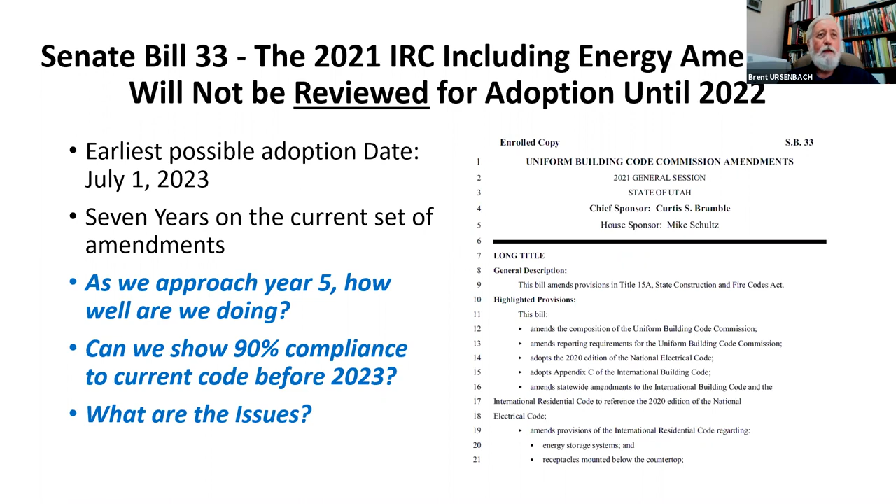There's no question building departments are busy right now and struggling for enough people. But I dare say those same building departments and their inspectors, when they go into a home, they regularly call out things about electrical outlets and other items throughout the house—spacing, enough space for the toilet, and everything else. Sometimes we just need to remember we can add to that list half a dozen or a dozen things to check when we do an energy inspection, and be thinking about energy when we enter that home.

Now, many of you are familiar with this—if not, I want you to know we have a handout, a little one-page handout, a residential guide. Many of you have seen this. We just updated this guide. The previous guide had... let me start over. I don't know if you can see my cursor—can anybody see it? Okay, great, I'll use it then.

I have a note here that this includes amendments effective July 1, 2021. I've eliminated all the text talking about the steps we made to get to this point. Starting at the first item, the red text indicates an amendment. Number 5 just says the 2012 Utah REScheck has to pass by 5%. I eliminated all the verbiage about the previous steps where we went from 3 to 4 and now to 5—that's what's occurring throughout the whole document.

Now, if your screen's not as big as mine, you probably won't be able to read this. So I'm going to break this down and go through each paragraph or section of this one by one in our presentation today, with a special focus on the amendments, but also just on the basics of the energy code.

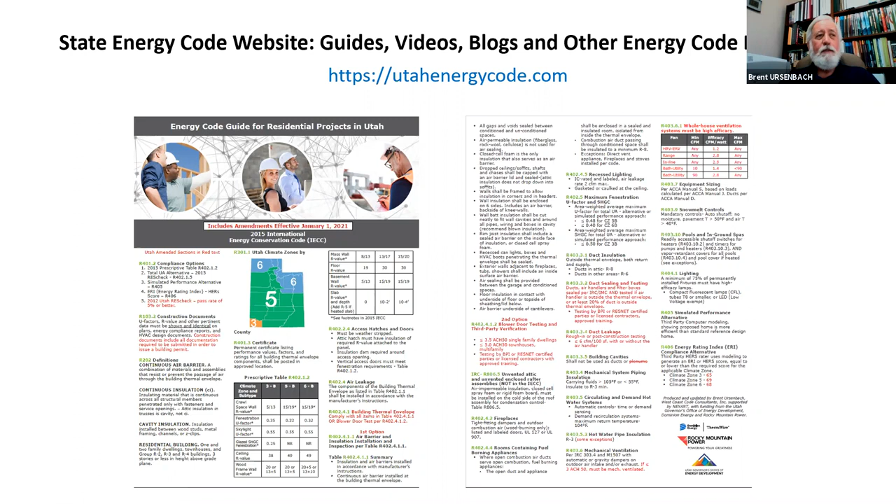So when you open the website, this is what you'll see. You'll have that graphic, that picture on the screen will cycle through different components. But what I want to focus on first is our menu bar across here.

We have residential code resources, commercial code resources, live stream, which would take you to where we are today, and an energy code blog that we've started recently, where I answer questions or other people answer questions that might be useful, and how to get a hold of us. Of course, you can get a hold of me by simply sending me an email or a text.

Going to the residential code, when you click on that one, you will find residential energy code resources and training videos and materials.

Going to the next step, under energy code resources, we have our residential quick guide. That's the document that I just brought up on the screen.

The 2015 energy code amendments - those are actual pages out of the code that identify the amendments. You can see where they are in the code, and it makes it a little bit easier to read your code book. Now, that one has not been updated. It's going to be updated within the week to show the most recent one. I've been waiting for the legislature and the governor to finish, and so that one will be updated shortly.

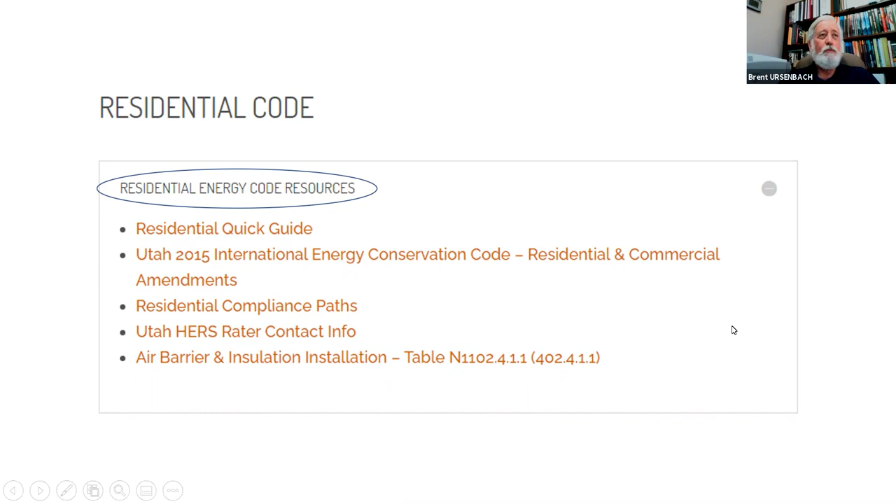So if we go the next step, our energy code resources in the residential code section of the website, we have training videos from previous classes. Some of them are just the slide decks, some of them we have video, and I want you to know they're available for you anytime. If you're teaching a class and you want to use them, use them.

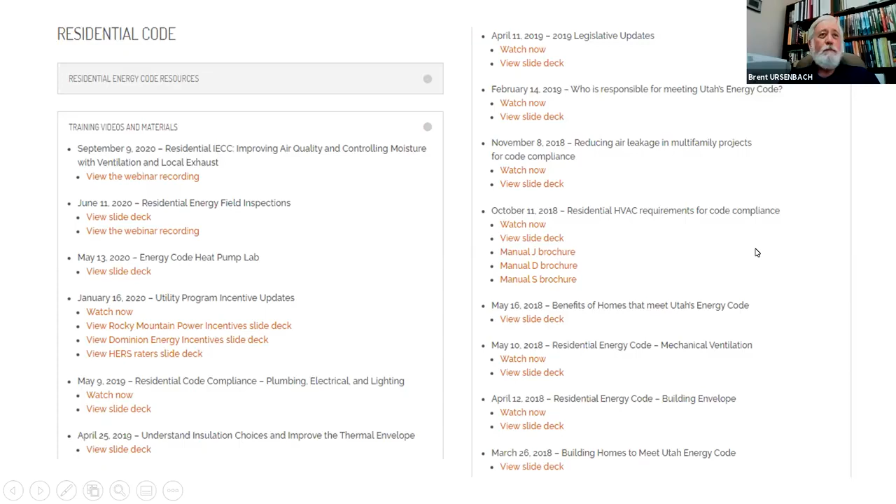On the commercial side, we don't have quite as much content there, but we are working on that. And there we have a quick guide that is very brief because the commercial energy code is so complex. And again, the amendments, and then we have some other information there and information on some of the classes there.

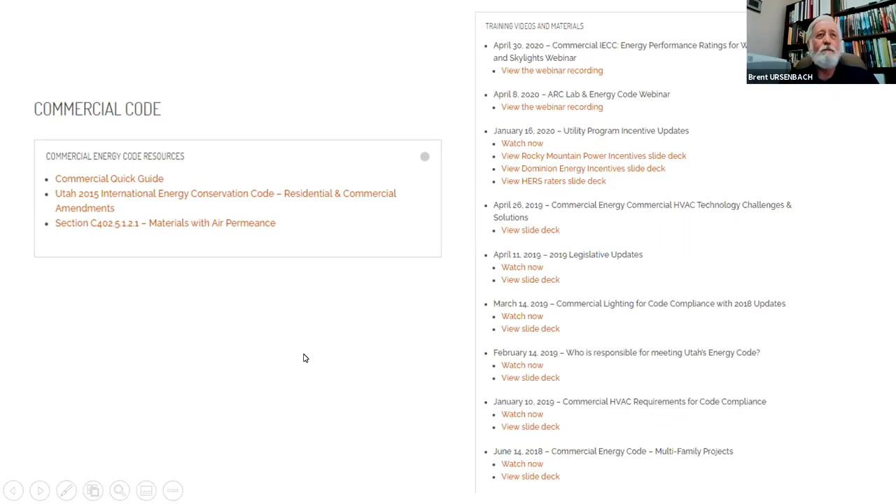And then we have also on the next link on the website where you join a live stream. We have a slide deck from a virtual field trip we did last year. After everything shut down, we had to cancel a field trip that we were going to do, so I have a number of photographs in there that go through a residential energy inspection.

Again, if you go there and you see a question or something, feel free to call me and we can go to that slide deck and we can talk about it. And then we have our Utah Energy Code YouTube channel.

So on the Energy Code website, we have easy access to guides, new resources that we add monthly. You can ask questions at the website or send them directly to me. I am trying to post a blog every month now. This is fairly new, where I answer frequently asked questions.

And as I mentioned earlier, here's a discussion on the home that I was asked to look at that has a vented crawl space and no insulation in the floor system, no insulated duct. You can read a little bit more there.

In the commercial code, we have a fairly strict requirement for minimizing the amount of piping that we have in our hot water systems in our public restrooms.

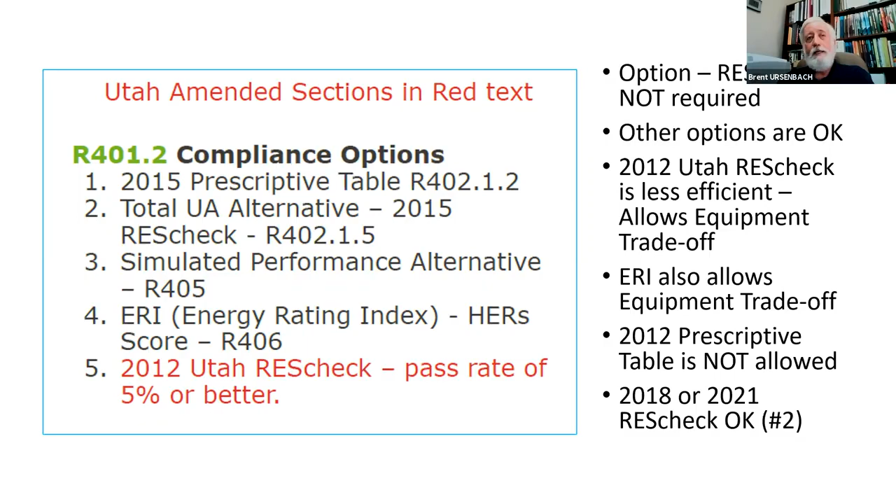I see a lot of experience out there, people that have been around the industry a long time. We all know that if we have a good set of plans, we have a much better chance of getting the building built the way it was intended. I like to take the attitude when I do a plan review: could I build this building off this set of plans? Do I have enough information here that I could build the building code compliant and meeting the desires of the customer?

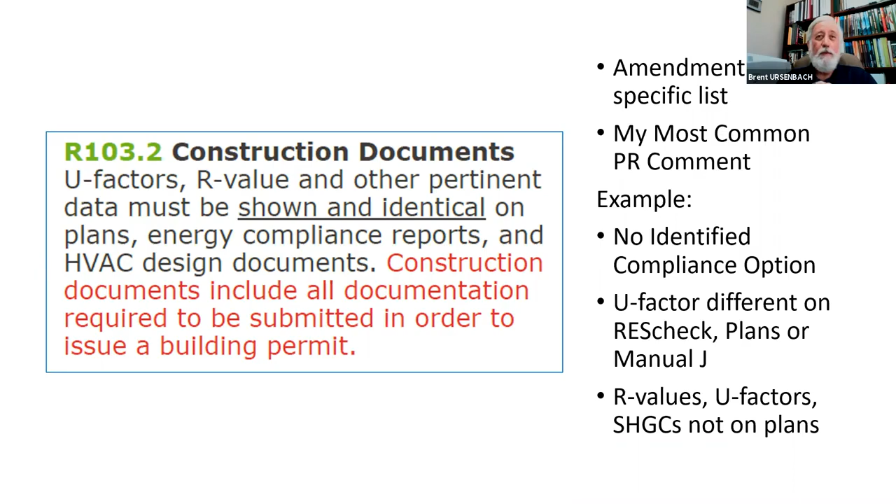There's a number of definitions in the code. I'm going to just pick 4 of them, and these are on our checklist, our guide, and just talk a little bit about these because they're commonly misunderstood.

The first one is continuous air barrier. It's a combination of materials and assemblies that stop air from leaking in and out of our building envelope. It can be located inside or outside the building. It can be our drywall, if we're making sure we're sealing at edges and at plates and maybe in the attic at certain locations. And we'll talk a little bit more about that.

Continuous insulation. This one is misinterpreted so often. Continuous insulation is insulation that is only penetrated by a fastener. If you have an attic with trusses and you blow 12 inches of insulation in there, the first 3.5 inches of insulation has a truss bottom chord running all the way through it. And people say, well, that's a cavity. But then invariably someone says, well, once we get above that bottom chord of the truss, the insulation is continuous. Well, it's not continuous, because it is penetrated by all those intermediate chords on the trusses that are going up and down. And if you take a thermal camera, you can see that.

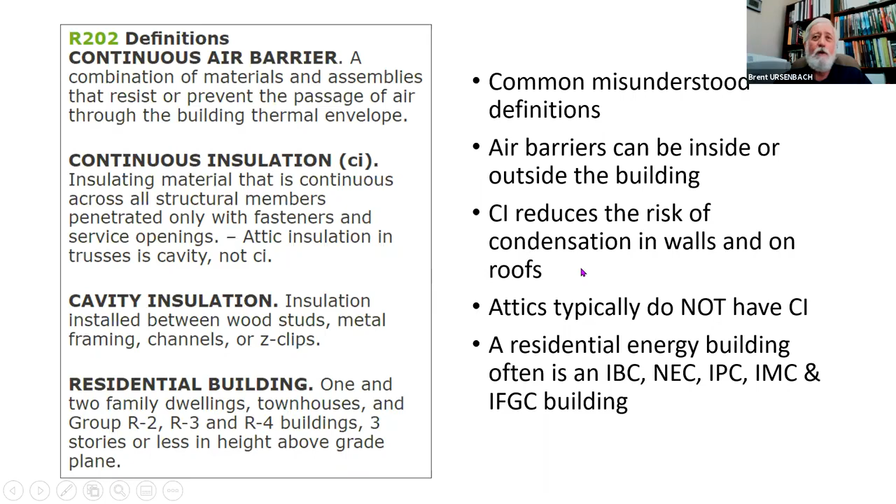One last comment on continuous insulation: continuous insulation greatly reduces the risk of condensation forming in walls or on roofs. And we will touch on that a little bit more here in a minute.

Climate zones are based on county lines. It simplifies things but it is not completely accurate. While I was working at the county, we worked on this building that they built on top of the summit at Snowbird, at 11,000 feet. The Utah County line is just within a couple hundred feet south of it, and Summit County is on the other side, not too far away. But it is still climate zone 5, even though the climate more closely represents climate zone 6 or 7. For simplification, the energy code went back in 2006 to using county lines rather than trying to narrow it down with a closer focus.

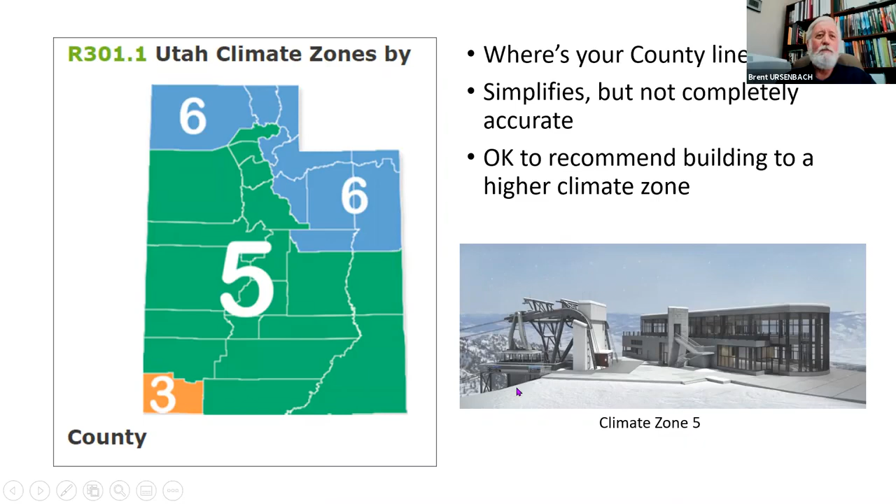The climate zone is reflective of the major portion of the population. So if you're building at 10,000 feet but it's in climate zone 5, you just might want to consider that, yeah, by code we're climate zone 5, but maybe I ought to build like it was climate zone 7 and be a little more aggressive on my insulation for that building. This is like a 20,000 square foot building up top there - if you haven't seen it, it's quite an interesting building.

Certificate - and I'll admit that I wasn't too aggressive on this one when I was inspecting. But as I think back through my career, if I'd gone into an existing home to replace a furnace and air conditioner, it would have been really nice if I had an identification method to know what kind of insulation is in my walls or in a floor or in a roof, and what the windows were.

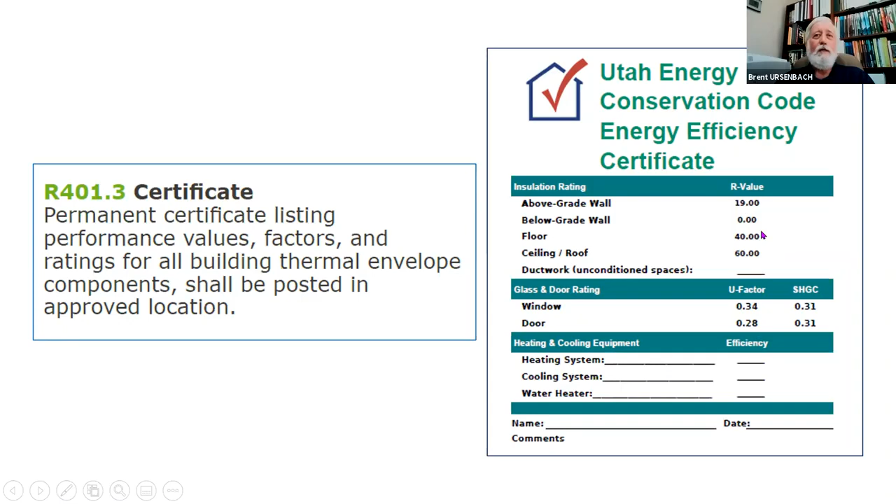So this is a label that's actually automatically printed by REScheck, and you don't have to use this exact label, but every home should have a label certificate posted someplace. It was originally suggested to put it in the electrical panel; now it's suggested you put it in a mechanical room or someplace where you can see it. It's simply to identify how the building was built when it was first built. I think it's probably a good thing for a little bit of accountability - yeah, well, I did put R19 in that wall, or I did put R60 in the attic.

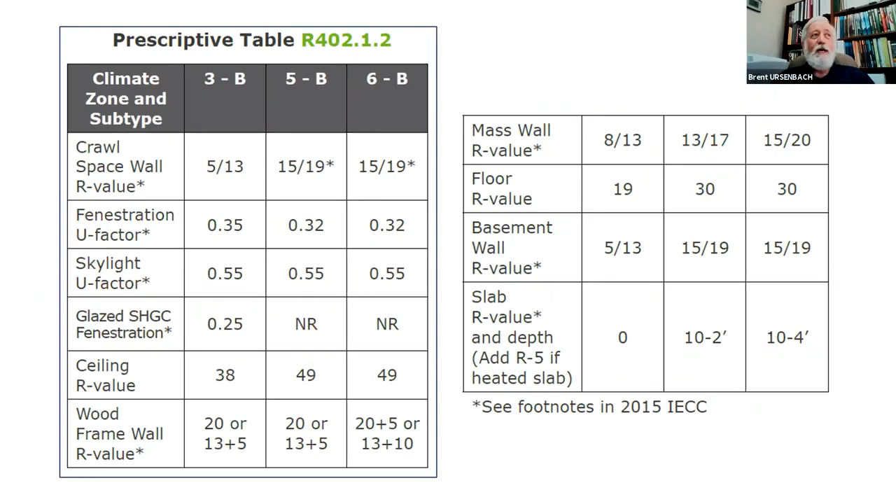Prescriptive table that we mentioned earlier - I took out just those portions that apply to Utah. If you remember the map of Utah from a few slides back, climate zone 3 is Washington County, the St. George area. You'll notice that the walls require a little bit less insulation, and the windows don't have to be quite as good as the windows for climate zones 5 and 6. We don't have a solar heat gain coefficient requirement for climate zones 5 and 6, but in a cooling dominated market, they do have a solar heat gain coefficient requirement in St. George.

Attic insulation again - higher in the higher numbers. The higher the number, the colder the climate; the lower the number, the warmer the climate. So 1, 2, and 3 are more cooling dominant markets, and 4, 5, 6, 7, and 8 get progressively colder. I think there's something interesting to note here.

If we come down here on wood frame walls, for 3B it is R20, or 13 plus 5. What's 13 plus 5? That's R13 in the cavity and R5 continuous on the outside. Same thing for 5. Climate zone 6, however, says R20 plus 5, or R13 plus 10 - those are your two options. Notice that climate zone 6 does not, in the prescriptive table, have an option where you just insulate the cavity. They want you to put continuous insulation, at least R5 and preferably R10, on the outside of the building. Why would they do that?

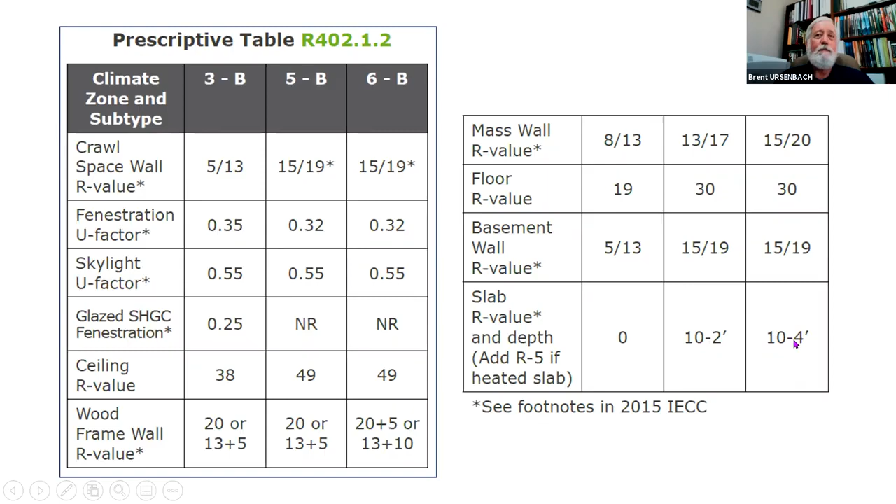Hatches, attic accesses - a big source of air leakage that we tend to ignore. This has been in the code for enough time, I think through at least 2 code cycles. That attic access is supposed to have the insulation attached to the door, because if it isn't attached, the first person through that attic access is going to push it off to the side, and it's never going to end up back on the hatch. So it needs to be attached to the hatch.

For mine, I just glued a bunch of polyiso foam board on top of it to get the R value there. It needs to have a gasket around the trim, and the insulation needs to match the value required. But the thing we sometimes get hung up on is if your access is in a short wall or even a tall wall - if your access is a door, then it doesn't have to meet the R38 or R49. It only has to meet the requirement for a door, which would be like a 0.32 U factor door.

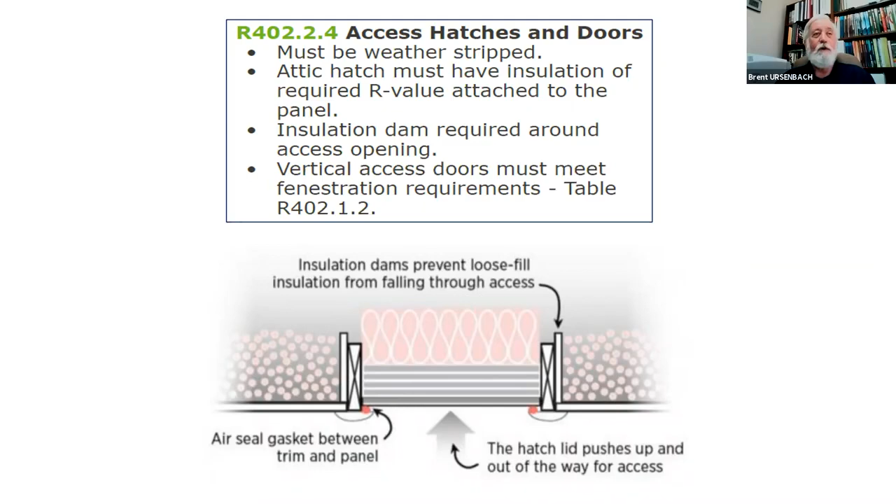I think we missed this one, and it's a pretty easy thing to do, but it makes a big difference, especially if we get that insulation attached so it's always there. And if we get just a little piece of foam weather stripping around there - I can guarantee you there are thousands, tens of thousands, hundreds of thousands of homes that have that big piece of fiberglass insulation sitting off to the side rather than sitting on top of it. And I'm probably guilty of having done that before, because you don't want that insulation falling all over you as you crawl back in.

Going down through our guide, we get to another amendment, and we talk about air leakage. Air leakage requirements in 402 give us 2 options, and this is amended. The 2 options are: we either comply with all the items in table 402.4.1.1, which is this table - unless you have a big screen, you're not going to be able to read it very well, but it's right out of the code, either chapter 11 or the IECC. The component identified, we have the air barrier criteria, how we're sealing the air, air sealing the building, and installation criteria. So what the amendment says is either do this whole list or blower door test the house.

There are a number of things on here, and I'm just going to go down the list real quick and read them off, then we'll talk a little more about a couple of them. I summarize these further on - this list is not in the guide, just a summary of it. So ceiling and attic: we have a discussion here that the air barrier at drops and soffits and stuff like that should be aligned with the insulation. I have a picture I'm going to go over on that one. Access openings need to be sealed. Insulation in any drop ceiling should align with the air barrier, so they kind of go together, the insulation and the air barrier. But there's a couple of key ones that I do want to touch on, I'm not going to take the time on the rest because I don't want to run out of time.

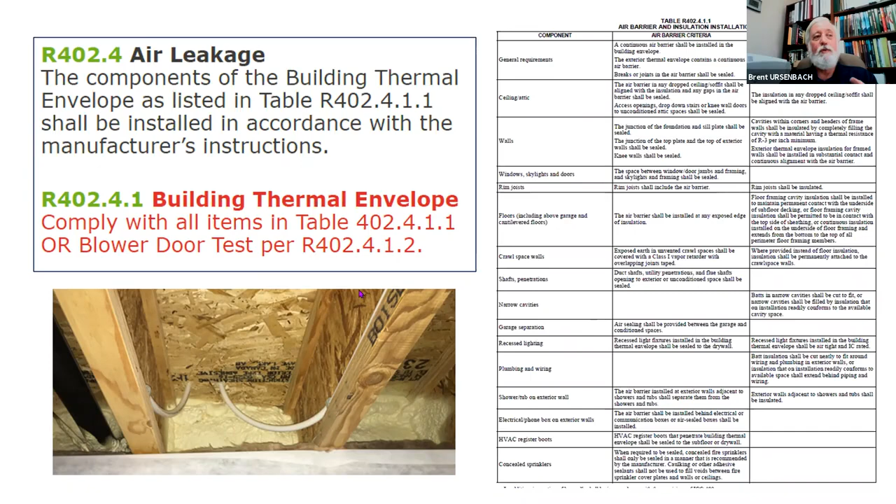The interesting thing about all of this is if we did not amend the code, we would blower door test and we would also do the table. Because the code is amended, we have the choice: blower door test or do this. And so, blower door test.

I think most of you are familiar with blower door testing. I'm pretty sure Jeff Williams, right there in the center of my screen, is familiar with it because that's what he does all the time, and there are others on who might be too, though I can't see everybody on my screen. Our HERS raters all do blower door tests every day. They simply depressurize typically the whole house, take it to 50 pascals, and see how much it leaks. If you leak too much, you don't pass. If you're tight, you pass, but you have some other things you need to deal with.

The code, and nationally the experts, recognize that what we really need to do is this table. If you do everything on the table and then hook your blower door up and test, you're going to pass. It's going to be a nice tight house, you'll reduce energy consumption, and you give yourself the ability to control your air quality mechanically rather than having uncontrolled leakage in and out of your house.

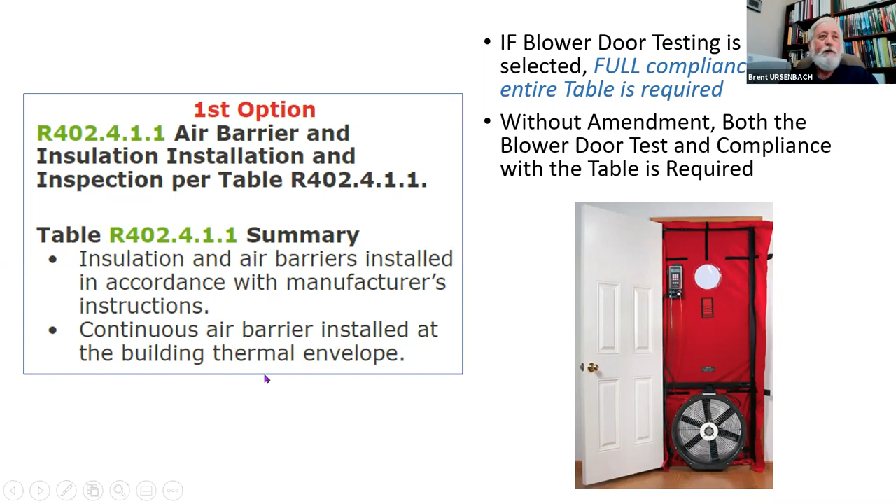A continuous air barrier. We've talked about what some of those things are. All gaps and voids sealed between conditioned and unconditioned spaces. Does that mean the wall between the garage and the house? We need to recognize fiberglass, rock wool, and cellulose are air permeable. Air moves through them, and so we need to seal those. Closed cell foam is really the only insulation that I know of that really serves as an effective air barrier.

Drop ceiling, soffit, shafts, and chase shall be capped. Let's think about this a little bit, and maybe I have a picture, but it's not the best one. I need to drop a graphic. If we put drop ceilings in closets or wherever we put them, or we put in scissor trusses and then we drop ceilings in some areas, we have this area where the ceiling line comes up and then it drops down and then it goes across, then it goes back up.

And the insulator comes in and he insulates around on the walls, and then some blown insulation is going to come down on the bottom of the drop. And we've got a mess. The insulation doesn't stay in place. The insulation, vertical insulation, does not have an air barrier on the backside, and it falls out. And we have all these places for air leakage.

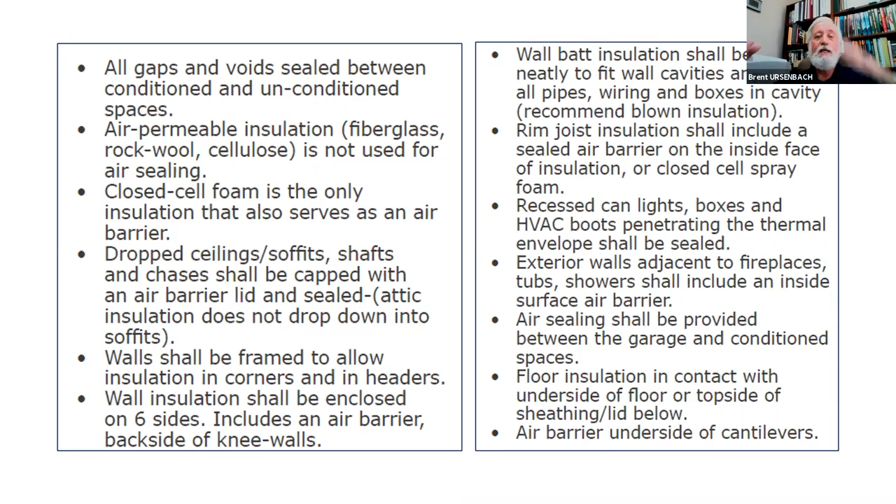What this table is really telling us is we should have a lid going across our entire ceiling. So if we have scissor trusses and we're dropping in places, anytime we drop down, we should put a lid in there. We do it if we have a chase going all the way up through, but we should put a lid in any of those drops. If we drop for a bunch of ductwork, we should have a lid in it first.

And then when they come in and blow the attic insulation, it's continuous attic insulation without any of this dropping down and going back up. It's a cleaner job, and it's much more efficient and effective at insulating. And we eliminate a lot of air leakage. So put a lid in the bottom, in the top of these drop down spaces, so we have a continuous air barrier at the ceiling line, the bottom of the truss, and we solve a lot of problems.

Walls need to be framed so you can insulate the corners. Wall insulation shall be enclosed on 6 sides. I've already talked about that. That includes knee walls. The back side of a knee wall for a bonus room has to have an air barrier on it. Cut and fit around pipes.

I really like blown insulation because I think it solves a lot of those problems. Rim joist, we talked about already. Recessed can lights and such need to have those penetrations sealed where they penetrate the air barrier. Your ceiling is your air barrier in most houses, and that needs to be sealed. We need to be aware of our fireplace, tubs and shower areas and make sure we have continuous air barriers there. And air sealing provided between garages and conditioned spaces.

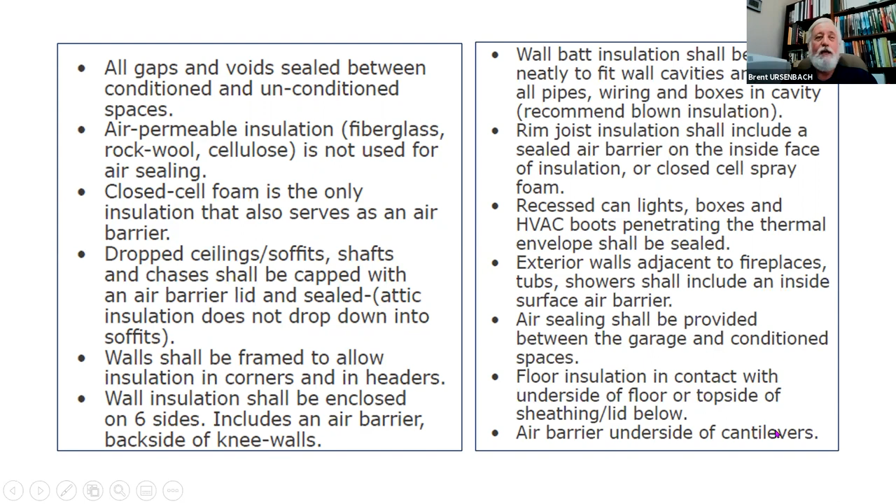Insulation should be in contact with the underside of the floor or on top of a lid below, and air barriers on the underside of cantilevers. And I have a picture of that. That's a very important one. Or you do a blower door test. So you do all those things, or you do a blower door test.

Now here's a big one. And this is the one that I think a lot of the people that are online didn't realize until maybe they saw the announcement for this class. And I'll be honest with you, I didn't catch it until just a month or two ago.

For many years, oops, too far.

For many years, the last 4 years, we expected that on January 1, 2021, this number, 3.5 air changes per hour, was going to change to 3 air changes per hour, because that was the original number put in the first batch of amendments. So we started out at 5 air changes per hour about 4 years ago. We dropped to 3.5 air changes per hour January 1 of 2019, and we were expecting to go to 3 air changes per hour at the first of this year. And I dare say some of you have probably been enforcing that or asking for that.

However, 2 years ago, when we saw an amendment take place at the time we went to 3.5, the industry that builds townhomes was concerned, and others, HERS raters and everybody else was coming to me and saying, you know what, we got a problem. It's hard to get down to 3.5 air changes per hour on a townhouse because that common wall, that party wall, we don't seal up like we do our exterior walls. And so they were leaking between units. They weren't leaking so much to outside, but they were leaking to units.

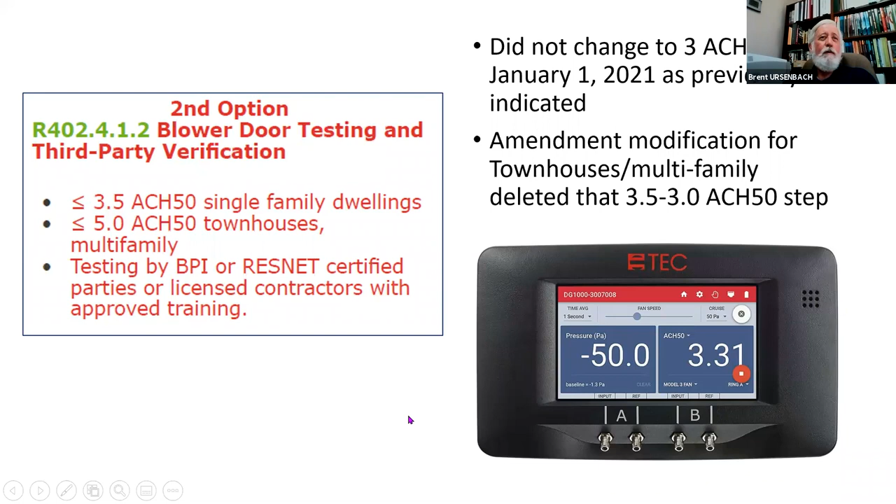And I have a little graphic here of one of the fancier devices with blower doors that tells the pressure. They've taken the house to a negative 50 pascals, and at that pressure, it leaks 3.31 air changes per hour. Now, this is not in the energy code. This is in Chapter 8 of the residential code, and it's also in the IBC for commercial buildings.

Remember me talking about condensation occurring on the backside of the wall? The condensation problem is more severe when we get into roof systems, especially rafter systems, where we do not have an attic we can ventilate, or it's difficult to ventilate the airspace because of dormers and gables and such above the insulation in a rafter. So what do we do? We net and blow it, filling the whole thing full of fiberglass insulation or some other type of insulation.

The moisture that rises with the heat, if it gets through the drywall, which it will, or the can lights or whatever, and contacts the underside of the roof deck, it's going to condense. The roof sheathing is cold. And so we have this condensation occurring on the underside of that roof deck.

We have in the residential code that if you have this unvented enclosed rafter or unvented attic, you need some form of air-impermeable insulation, closed cell foam or rigid board, either installed on top of the roof assembly or on the underside of the roof assembly. So you either need to put rigid foam on top like we do on flat roofs all the time, or you need to put some spray foam on the underside.

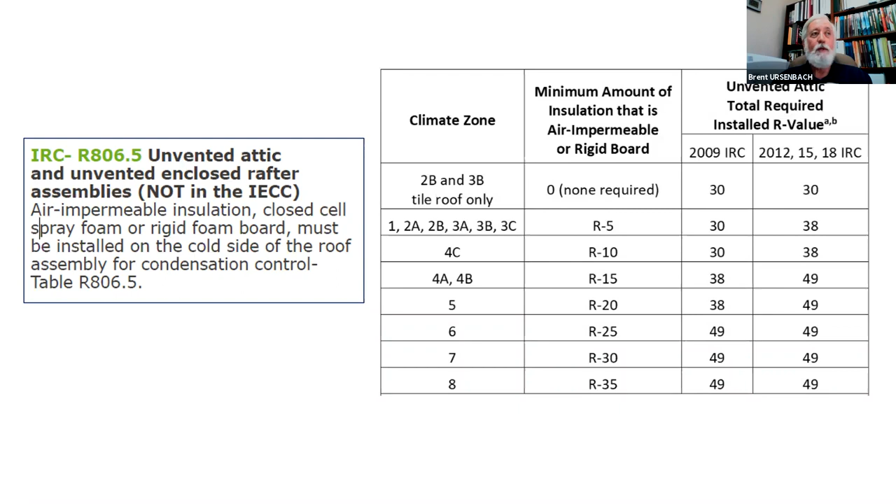Whatever the case, if you have cold OSB or plywood and moist air comes in contact with it, it's going to condense. This is going to happen in unvented attics and unvented enclosed rafter assemblies. Please contact me if you have a question on that—I have some handouts, and maybe I'll do a blog on this one to describe it a little more. I've talked about it in other classes, but this is really important.

I know up in the higher areas in Summit and Wasatch County, there's been a lot of problems with this over the years because that's how they like to build a house—with TJI rafters, high cathedral ceilings, and big windows that look out over the mountains. And then you end up with a condensation issue.

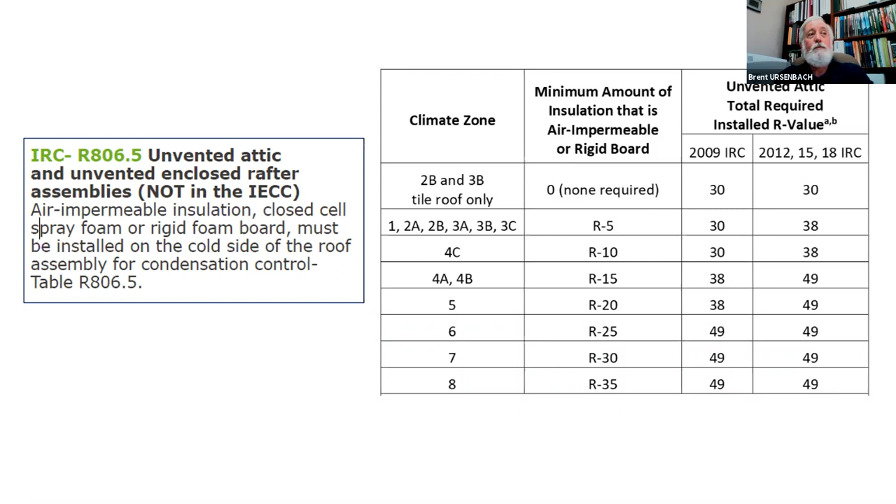Fireplaces. If you've attended a lot of my classes, you've heard me call these wood-powered exhaust fans, and that's what they really can be. We all know how much air they'll draw out of a building.

We have some challenges installing wood-burning fireplaces with our current code. We're building buildings tighter and tighter, and we simply cannot supply the combustion air to them. I bought my first home in 1975, and it had a masonry fireplace. It was a new home, and that was one of the selling features. Even that home, with junky windows and no attempt to air seal, when I got a fire going it was powerful enough that it reversed my B vent.

You'd walk downstairs, and if my furnace or water heater turned on, the products of combustion did not go up the vent—they came into my house. And it happened to all of my neighbors. There were like 400 of us in this subdivision, same type of house, and every one of them, if you build a big fire, you had a problem. So what you did is you cracked the window in the living room a little bit to allow combustion air. Now we build a house 10 times tighter and try to put in a wood burning fireplace—we're going to have an issue.

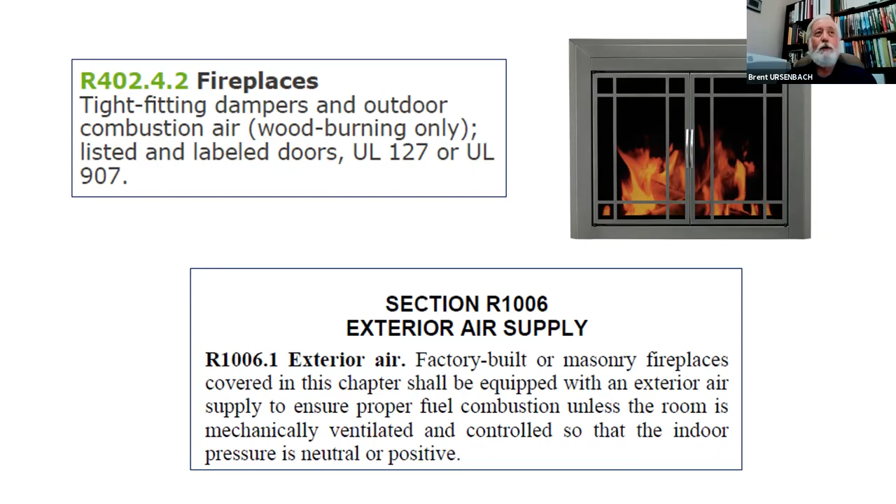The energy code says you have to have tight fitting doors. Chapter 10 in the residential code says if you have a factory or masonry fireplace, it has to have an exterior air supply to ensure proper combustion, unless the room is mechanically ventilated and controlled so the indoor pressure is neutral or positive. The only way you're going to have that room neutral or positive is if you're mechanically forcing air into that room, or you have doors that are sealed and you supply the combustion air inside those sealed doors. Those are the only ways you can really comply with the code, and that's the only way they're really going to work.

And that combustion air duct coming across into the room, you need to insulate it where it crosses the room. I don't think this is being enforced very much—I think there are a lot of systems that go in. We make all this effort to air seal, and then we still have a 6, 7, or 8-inch pipe or hole cut in the wall that counters everything we just did.

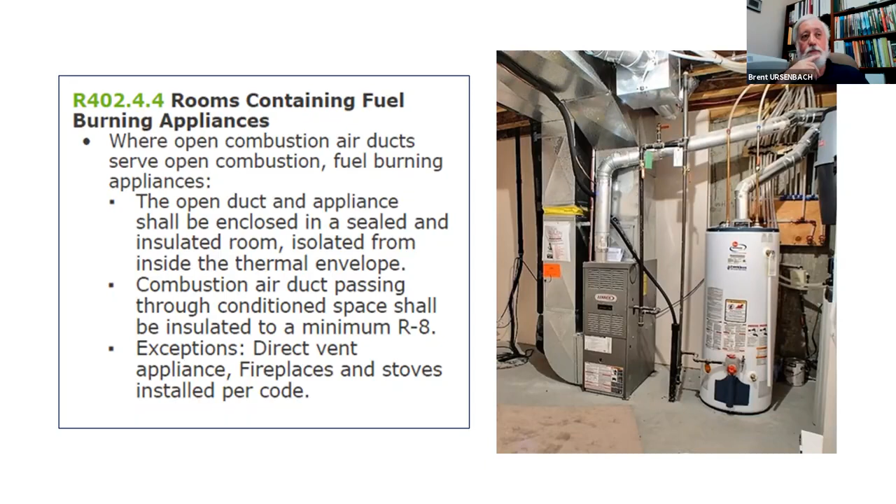Recessed lighting: either the can light needs to be an airtight can light with a gasket on it, or we make some effort afterward to caulk and seal the opening. These are a couple of the more minor things. They're not the big ones, but they're simple ones to check.

There's also in the code a maximum fenestration U factor or solar heat gain coefficient. The code says you can use a crappy window or a cheaper window, but you can't use a horrible window. If you put standard double pane glass with no low-E coatings, you might end up with glass that's a 0.45, 0.47, or 0.48. But if you take all your glass and do an area weighted average, it has to be 0.48 or lower for climate zone 5, or 0.4 or lower in climate zone 6. We do have an exception for things like small stained glass. We also have a maximum solar heat gain coefficient, which can't be more than 0.5 for climate zone 3B.

Just so everyone remembers, windows are rated with U factors, and a smaller U factor is better. U factors are the reciprocal of R. So if this was a 0.5 U factor, you take 1 divided by 0.5, and it's 2 - an R2. A 0.33 window, a good U factor, is an R3. A 0.2 window, 1 divided by 0.2 is 5, so that would be a triple pane window, and that's a good window. The smaller the U, the better. Our typical U factors in the prescriptive table are in the 0.32 range. You can have a slightly poorer window, but you can't go clear up to the bad range.

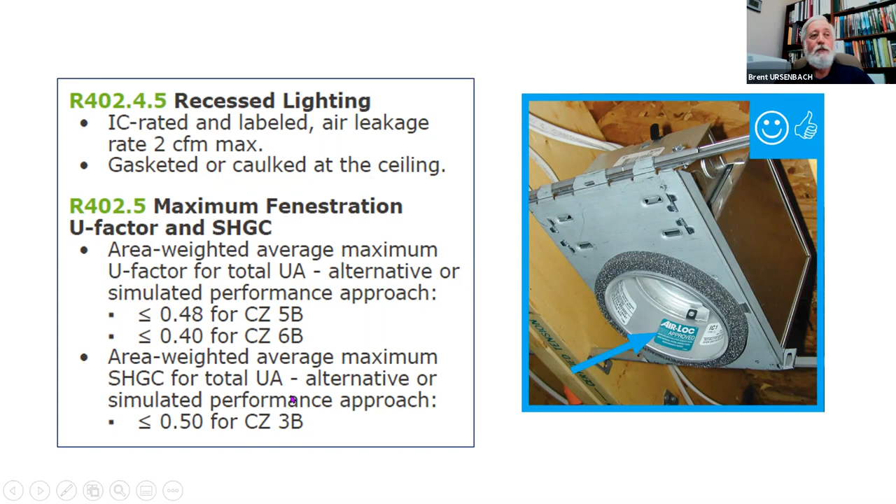Duct insulation - I get a number of questions about whether you can use R4 for returns. That goes back to the 2003 code, which allowed R4 for returns. You cannot use R4 for returns anywhere now. It's R8 for any ducts in the attic or outside, and R6 in other areas such as crawl spaces and garages.

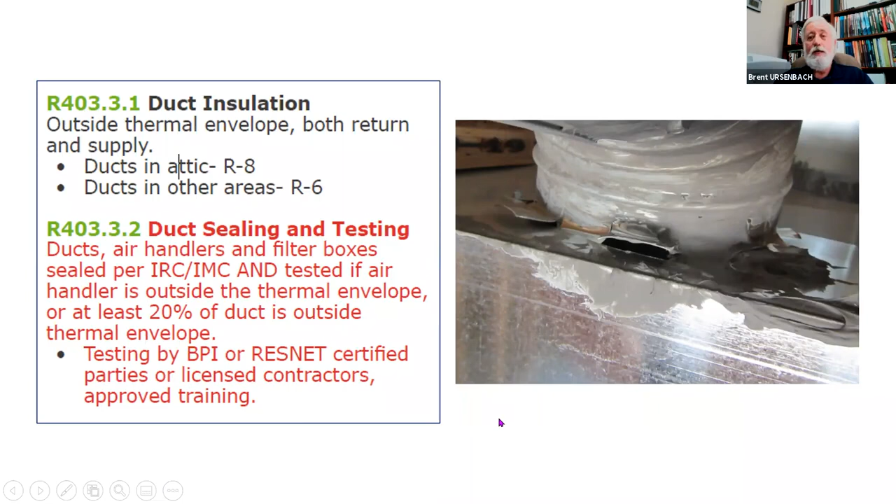I will add that the leakage rate has been amended in the state, and you're allowed twice the leakage that the code allows.

Now the number is 6 CFM per 100 square feet. So if you have a 2,000 square foot house, 20 times 6 is 120. Is there anybody here that wants to just throw away 120 CFM when you just barely spent the money to heat and cool it? You didn't even get any benefit out of it. If you at least blew it into your house and then it leaked out, at least you got some warming benefit, but you just threw it away before you even saw any benefit in your house. It was heated or cooled, the energy you put into it, and then thrown away. That's kind of crazy. And we have houses bigger than 2,000 feet, so you can have a lot of duct leakage and you're throwing a lot of air away.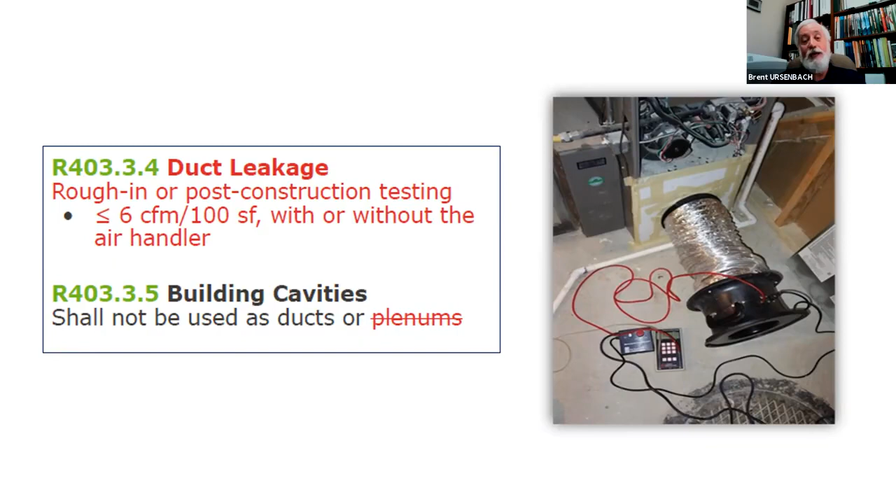That's why the code says don't pan joist. Well, we can pan joist - but if you're panning joist and then you have a bunch of duct outside your envelope going into an attic, you're going to have a real hard time passing your test. I think Jeff and others have probably had that experience - if they've had pan joist, it's pretty tough to pass a duct test.

A couple of, probably less frequent but still around a little bit, mechanical piping systems. What's a mechanical piping system? That would be our boilers, our radiant heat systems. Those areas that are not radiating heat into the living space need to be insulated to R3. So if we put in a system, our main lines running out to our manifolds should be insulated to R3.

Our circulating and demand hot water systems, when we're putting a circ pump on, we really need to look closely at plans. Builders, if you're putting one in, you need to identify it on your plans, or at least recognize that when you put them in, that entire loop should be insulated. That's identified in hot water pipe insulation. In the commercial code, we insulate all of our hot water pipe. In the residential, we identify just larger sizes - those recirculation loops need to be insulated.

Under slab, however, is amended out in our state - that's an exception. Apparently the plumbing contractors in Washington County, where they run a lot under slab, voiced the opinion that it was really expensive for them to insulate it, and so the legislature pulled it out for them.

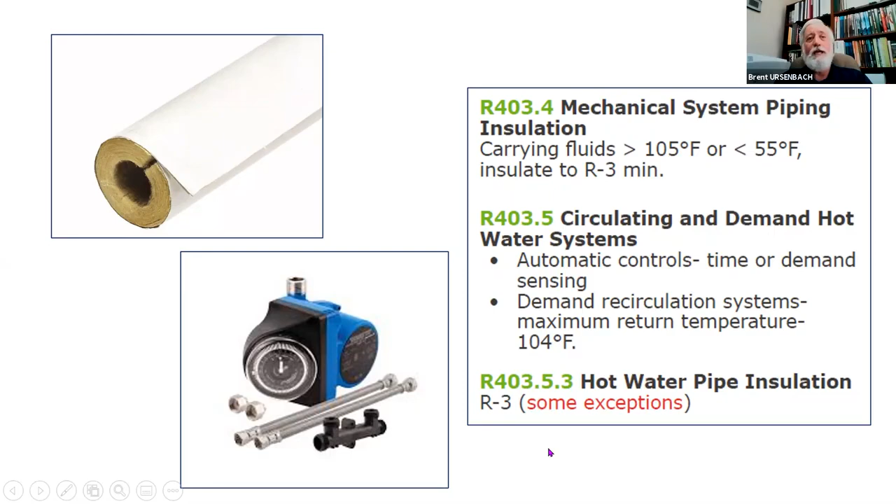If you put one of these recirculating systems in, they have to have controls that either shut it off at times so it doesn't run all night when you're not using hot water, or some type of demand sensing. So we have some requirements there, and we probably miss these most of the time - we're even missing this one. You should go to that section of the code and look at the list of about 8 different locations where you need to be insulating hot water pipes.

Mechanical ventilation. Here is what I was talking about - when we build tighter, we need to mechanically ventilate. This ties in with the code change that didn't happen, us going to 3 air changes per hour.

I've been talking a lot about building a tighter envelope. If I asked the question, can you build a home too tight - 20 to 40% of you would say yes, we can build a home too tight, maybe even more. I'm going to share my opinion: I don't think we can build a home too tight. What we can do is build a tight home and fail to ventilate it. So I'm here to suggest we should build our home as tight as possible, then mechanically ventilate it, because then we can really control removing contaminants from the house, and control exactly how much fresh air we add to maintain air quality.

If we build it loose, we think we're improving our air quality, but we really are not. We've got the outside walls and we're exchanging air back and forth at them. Maybe if the wind's blowing it flushes the entire house, but generally if there's no wind, air just moves back and forth through our walls, and we don't exchange the air in the middle of the house or take care of the contaminants. It's kind of like opening the windows at night and turning off your air conditioner - if there's no breeze, we get some relief right by the windows, but we don't cool down in the center of the house unless we move air through it. Mechanical ventilation by far improves air quality so much better than trying to naturally ventilate through air leakage or by cracking a window.

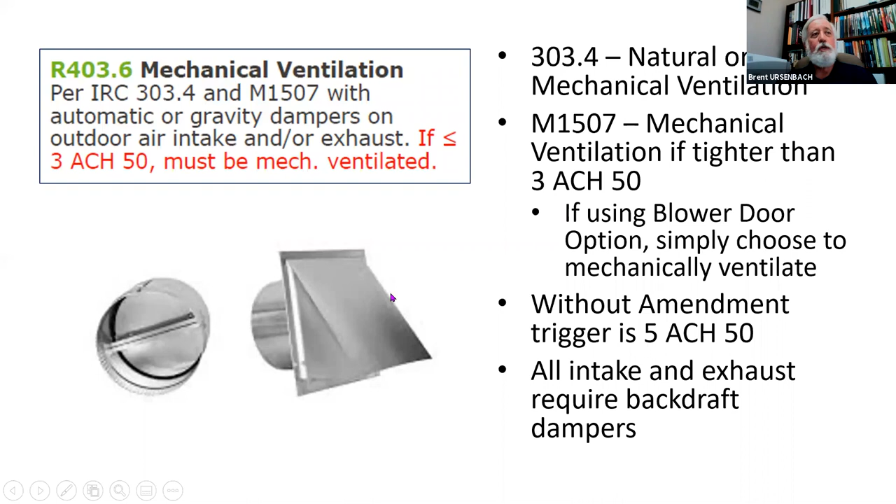So we're going to talk a little bit more about mechanical ventilation in the next slides. Those intakes or those exhaust openings that go through our building envelope, because we're talking so much about air barriers, need to have some type of backdraft damper in them. So let's jump on to the next one.

So if we decide we're going to do a whole house ventilation system, what is a whole house ventilation system? It is a system that runs continuously. We're constantly providing a small amount of fresh air into our house.

And how do we typically see that? Well, the most common way is they take a high efficiency, quiet fan, and some of you have seen these and some of you use these. Panasonic makes them and other companies make them. This small fan, and maybe it's in a hallway or maybe it's in the master bathroom, or maybe it's a combination of two fans, and they are wired hot to run all the time. They are constantly exhausting 30 or 40 or 50 or 60, or whatever's required for your house. The code gives us direction based on the number of bedrooms, how much air we should be ventilating, exhausting and replacing in our house.

So if we have a fan running continuously, it definitely does not want to be that $14 cheap fan that we buy at Home Depot, is it? Those things would drive us crazy, and they'd probably last 2 months and then they'd fail. They're horrible. They don't move any air. I could go on for the next hour about everything that's wrong with those fans, especially when you put flex duct on them and they move even less air. And there's a whole other discussion and a whole other set of code requirements for that.

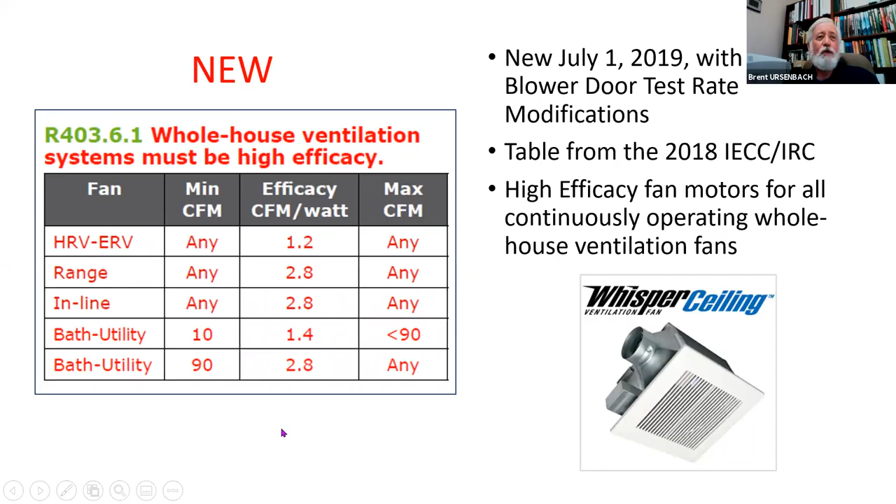As we're nearing the end, and we're going to make it in time, maybe a few minutes early, equipment sizing. I don't need to say anything more about manual J, D, and S, because many of you have heard me carry on about that a lot. But if you have some questions, give me a holler, and watch the blog for discussions on that.

Snow melt systems. I did a class yesterday up in Clearfield, and we had some people from Summit and Wasatch County, and the conversation went down this path: okay, we're building this really efficient building, and then we put snow melt in it and put a 2 million BTU boiler in to melt snow. What about the efficiency of that?

Well, that's another discussion. However, if you do put in a snow melt system, you have to put in the snow melt control that's poured into the slab, which senses the air temperature, slab temperature, and moisture. So the system only runs when the conditions are such that we have moisture and it's cold enough that there's a freezing potential. Otherwise, the system doesn't run.

Pools and in-ground spas, we have some requirements on ready access to switches, timers that shut off pumps and such. When the pool is not in use, there's a lot of horsepower and energy used running pool pumps, and pool covers if the pool is heated, with some exceptions.

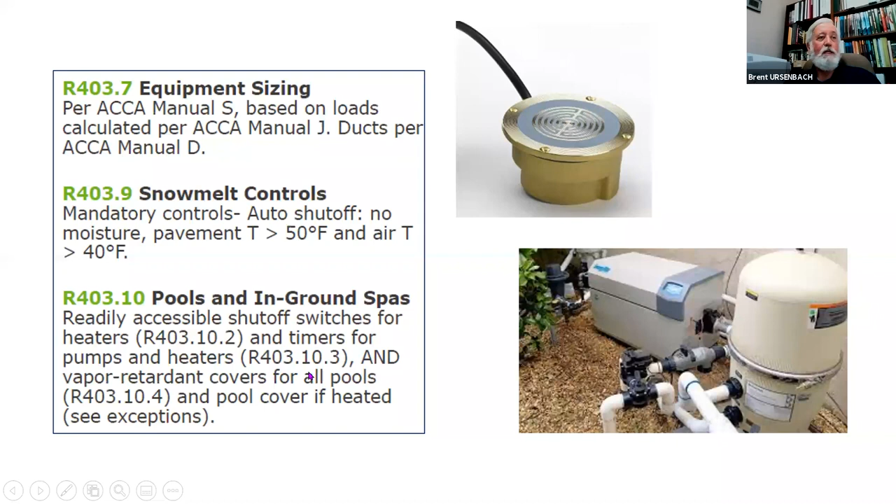Lighting: 75% of the light bulbs need to be high efficacy. When this first came into the code, five or six years ago, LED lighting was pretty expensive. It's a no-brainer now, and you can get all different color spectrums and everything. So our lighting has drastically improved.

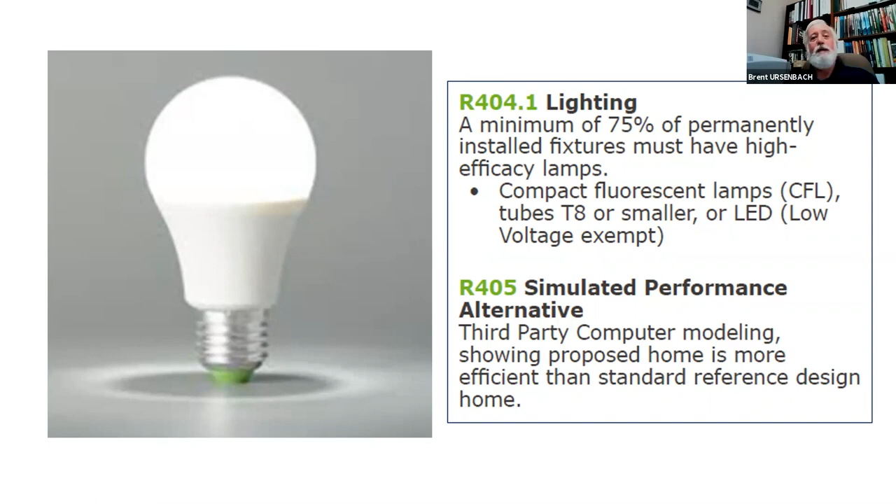The simulated performance model, that's third-party modeling. We talked a little bit about that before. It's based on a standard reference design, as I mentioned, and HERS ratings, or our ERI path.

I just wanted to add a little bit more information on this. You can go back into previous presentations where we talk about some of these in more detail. But a HERS rating is a score, and a home built in 2004 or 2006 is a reference home that has a score of around 100. So that's our reference home.

A home built at that time to the code has a score of around 100. As you go to 0, every step is a 1% improvement in efficiency. So a 65 home is 35% more efficient than that home from back in the early 2000s.

When we get down to the 30 range, that's when we're getting into the range they recommend if you're looking to go net zero, where you try to meet most of your energy needs with solar panels. When you get down into this 30 and lower range, you can meet most, if not all, of your energy needs with PV panels without having to put them everywhere in your yard, with a reasonable number of panels. So this is a great method of scoring a house.

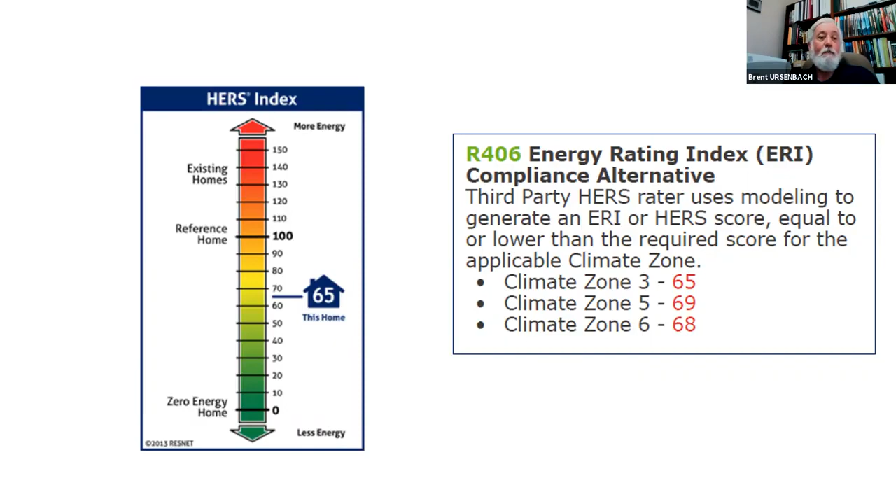With the ERI path, doing a HERS rating, if they don't have too much of it and they go to extreme measures on other areas of the home, put in high efficiency appliances, high efficiency HVAC equipment and lighting, and get credit for all that stuff, they can actually build that home that has what is really a poor window but gives them that great view. So it gives you some flexibility.

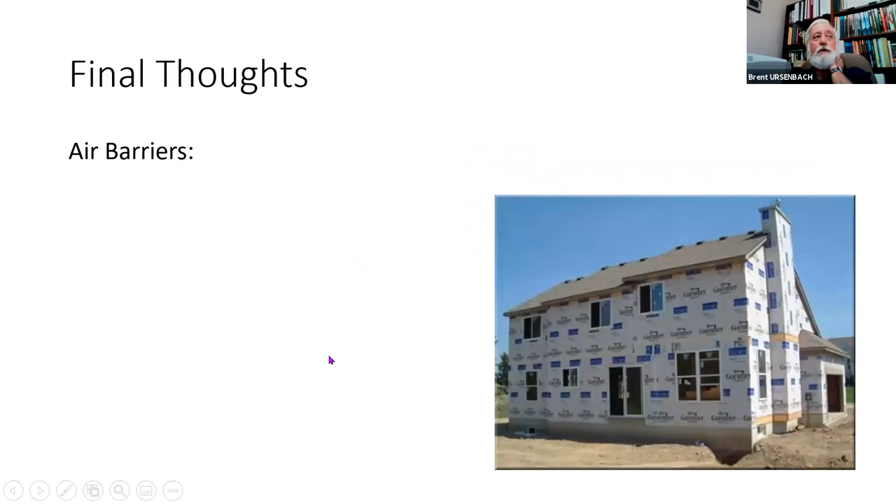Some final thoughts, just a few slides I'm going to jump through real quick. Air barriers. Can a building be too tight? I maintain no, it isn't too tight if we ventilate it correctly.

When we wrap the building paper, the Tyvek or whatever, isn't it interesting that they miss the rim area, which is one of the greatest sources of leakage. And they've wrapped around the garage, and that's fine that they put it on the outside of the garage, but did they do anything on the walls separating the garage from the home?

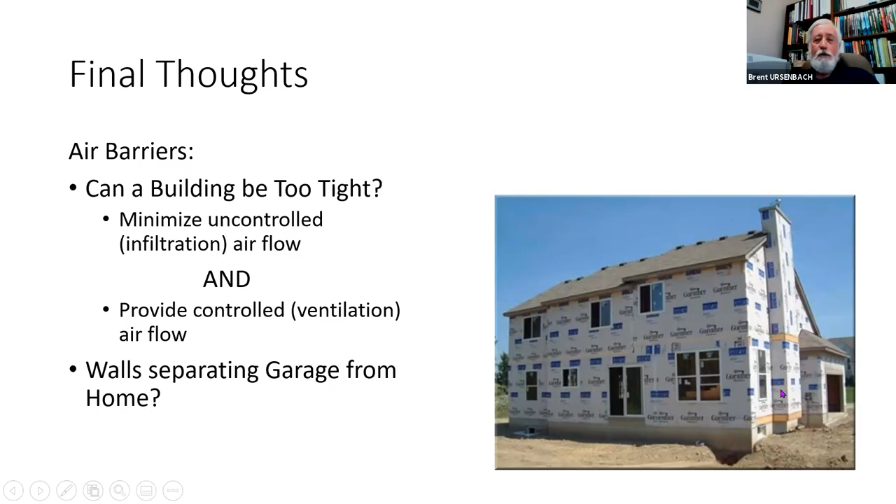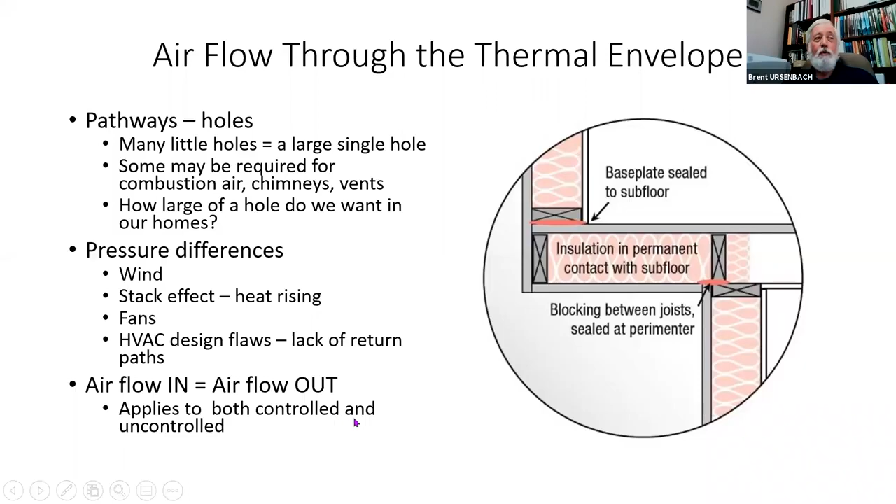Pressure differences in our house, whether it's the wind or the stack effect of air rising, or fans, or we have a flaw in our HVAC system, we don't have return paths in every room. All of those will encourage excessive airflow through our envelope. And remember, if we take air out of our house or we put air into our house, we're going to have air either coming in or going out to replace it. So it applies to both controlled and uncontrolled air movement in and out of our house.

Ducts in garage ceilings. This one, we talked about duct insulation. If we have ductwork in this garage ceiling, which we have here, and you can see the fur down too, often they run all this sheet metal duct and then we just come in and put batt insulation in between the framing. We end up with no insulation in this area, and we have voids and spaces all over within this ceiling assembly where we don't have insulation.

And if the insulation isn't enclosed with air barriers on all sides, it really doesn't work. My opinion, my interpretation, if you really want a duct system to be well insulated in the garage, either insulate it and then insulate the envelope, or do a BIBS net and blow system and completely fill the cavities with insulation. And this one works out really well.

Builders who install this system are finding far fewer problems with bonus rooms above their garages. The whole garage is insulated this way, eliminating all the cold spots coming through the floor and through the ductwork in those garage systems. This is an Ivory home, and that's what they've chosen to do on their duct systems where they run through the garage - completely filled. See the blog I wrote on this for more detail.

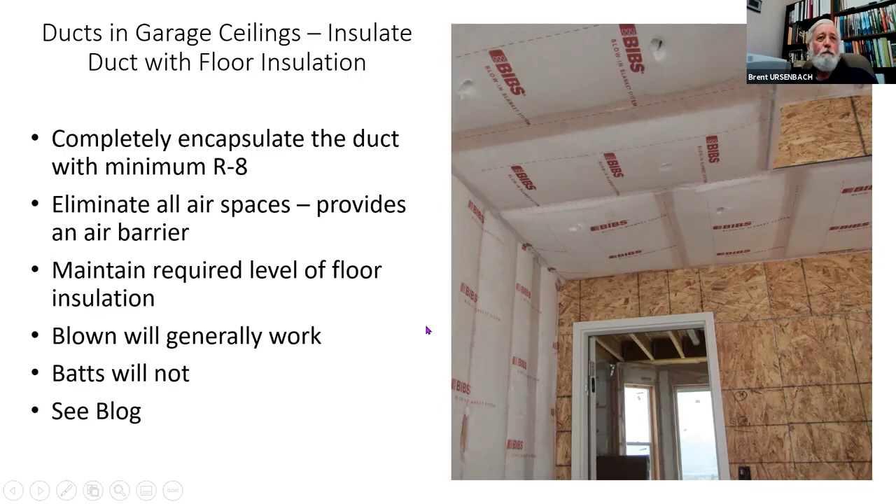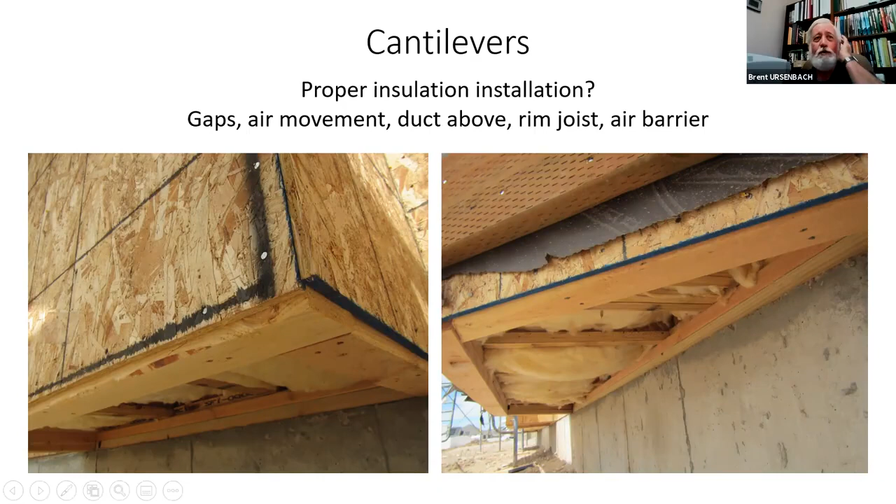Cantilevers. I had an experience in the house I'm in now when I bought it. Wind blew, and all I had was soffit metal on the underside of this, and the wind would just come right up through and race across, and the hardwood floor inside the house was brutal - it was ice cold.

Perfect application for where we need that spray foam to seal up the rim. And we need to think about the rim that's on the other side, out on the edge, really out at the edge of the home.

Fiberglass insulation is not an air barrier. If you pull drywall off or you pull soffits off wherever there's fiberglass insulation, it's going to be dirty because all it is, is a filter - the air is moving through it.

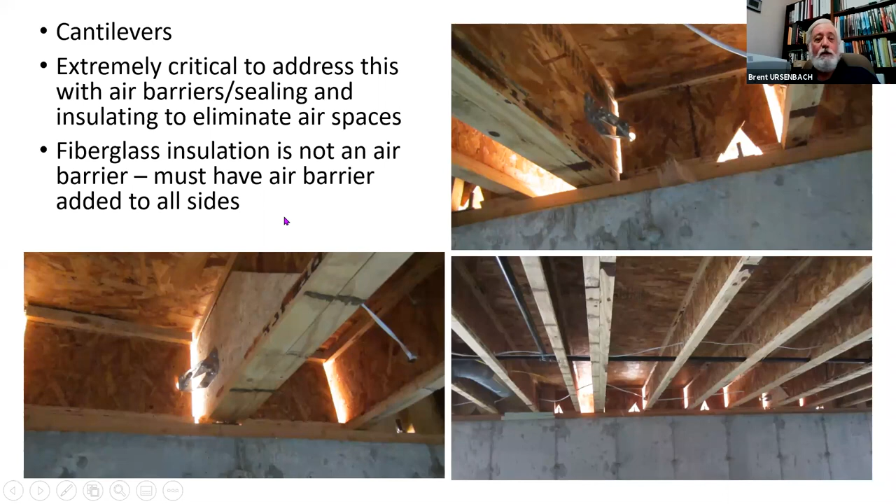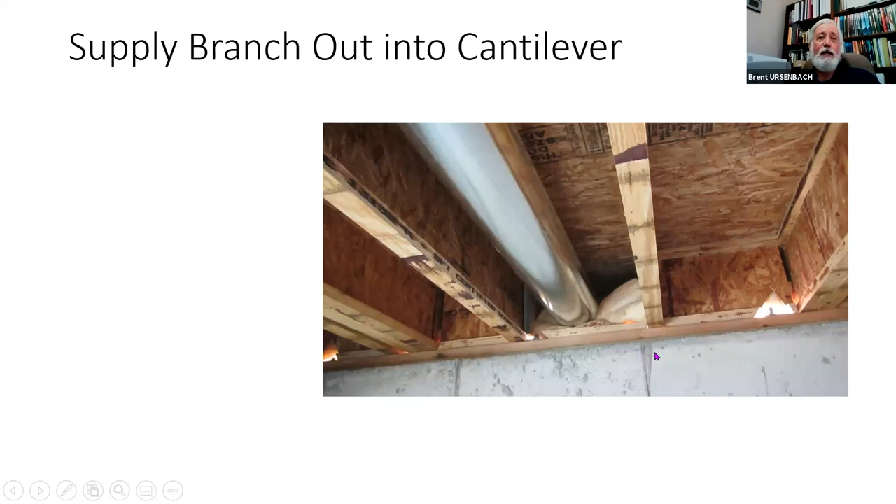So here's one of those again, and we can see the daylight through this. This is a bay window area. The supply air is going out there, and there's a piece of insulation shoved underneath it. What are the chances that the rim joist is really insulated well out around the perimeter of this bay? How well is this really going to be insulated? Well, we saw the picture a few slides back of how it's insulated there.

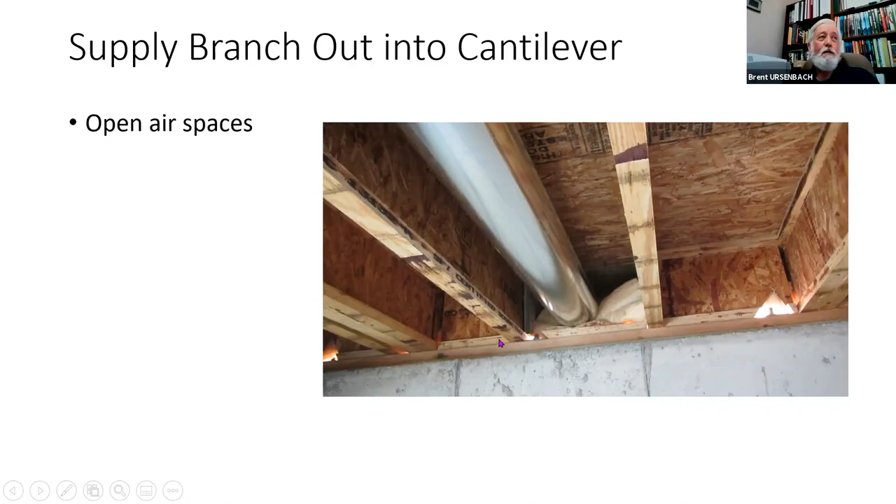Lots of open air spaces. Again, with open air space, it's like having the sweater and the windbreaker and not zipping up your coat - we have cold air moving through it, and the insulation is ineffective. That duct is not insulated as it should be, the way it's installed there. Is there a minimum R8 or even R6 all the way around the duct?

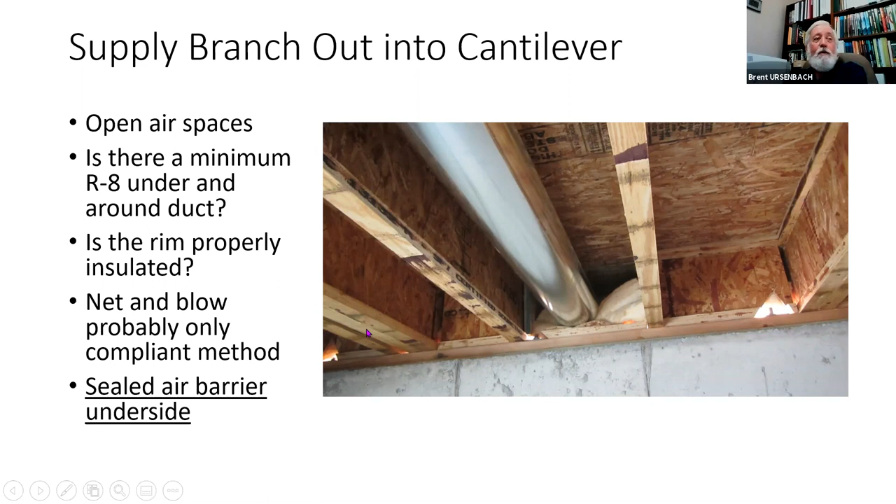Is the rim insulated properly? Net and blow, and then spray foam, is probably the only way you can really get that to perform the way you want it. And you have to make sure you seal the underside of that cantilever - put a piece of OSB on it, wrap the Tyvek down underneath it, caulk it, whatever you've got to do to seal it up.

Then your attic insulation is continuous all the way over the top, and we don't have all the air leakage that occurs at all these different spots because we seal the lid around the edges. This house had fur-downs everywhere - so many, in fact, that instead of the furnace in the attic, it could have been in the space above the laundry room, and they could have run the ductwork under all the lids, getting the ductwork out of the attic, which would have been a much more efficient system.

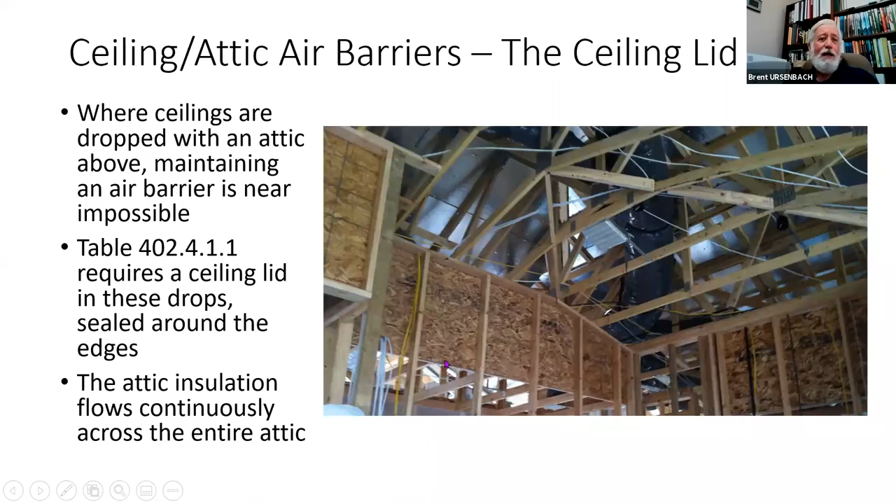The question in the chat is, you mentioned the closed cell spray foam is a great air barrier for rim bands and against the underside of cathedral roof deck. I agree completely, but I see open cell foam commonly used in the same areas. I'm sure the cost is a big reason why. I'm curious what your thoughts are regarding open cell foam. Are you aware of a good source of data specifications regarding the two forms of spray foam as an air barrier?

Let's see, it just jumped on me. And rim joist and cathedral ceiling applications, also in cantilevers. Great question, Kevin. Some of the open cell foams, my recollection is that some of them, when you reach a certain depth, they achieve the perm rating that we're looking for tightness. We're concerned about the air moving through it, but with that, we're concerned about the moisture within the air moving through the foam.